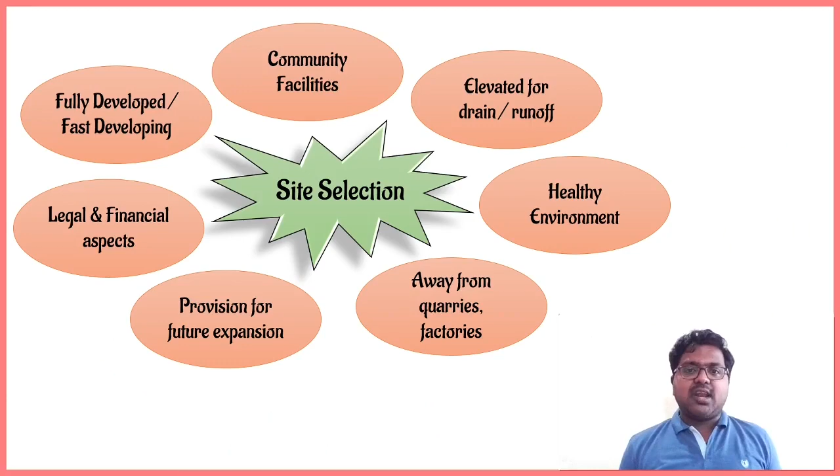In the last video, we learned about what building planning is, its importance, and the objectives of building planning. We also discussed the important points to be considered in site selection. Now, in this video, let us learn about the important building bylaws.

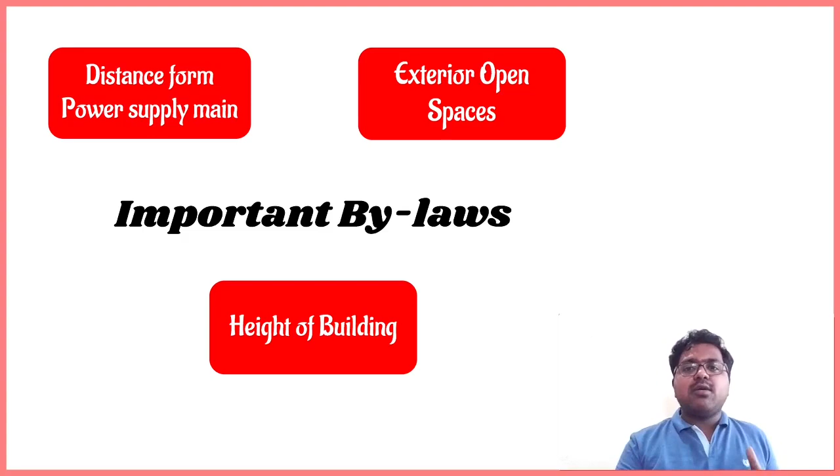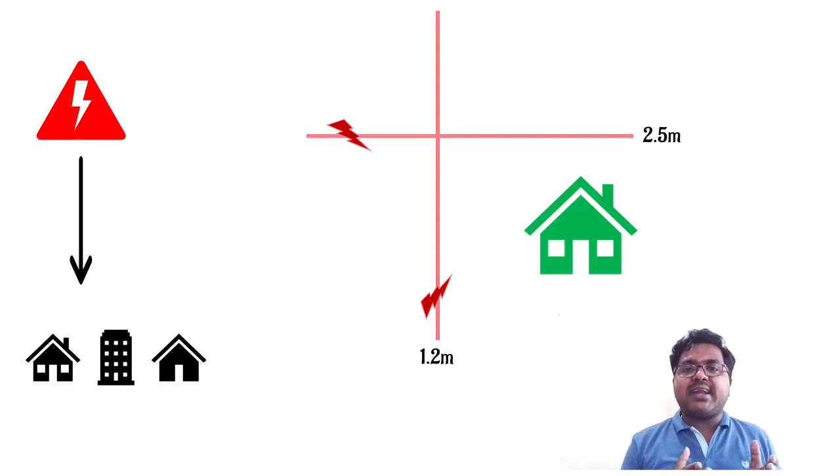Here, the important bylaws are divided into three categories according to NBC. The first one is distance from power supply main. Whenever we are considering a building near the power supply main, the building should be located in such a way that if low voltage power lines are passing, the building should be at a distance of 1.2 meters away from the lines if they pass sideways, and 2.5 meters away from the top.

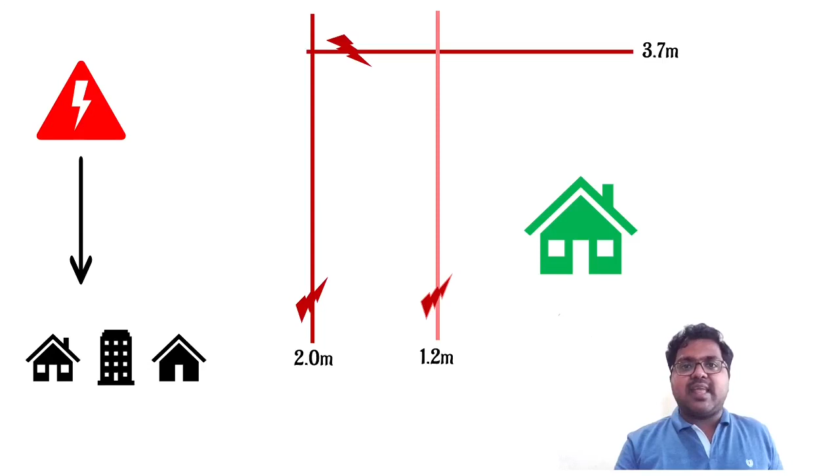This consideration is for low voltage lines, which are around 11 kilovolts. In the same way, when a high voltage line of more than 11 kilovolts is passing, the building should be located at a distance of 3.7 meters from the top, and 1.2 to 2 meters away from the sides. So according to the important bylaws, whenever an electrical main line passes through or sideways to the building, it should be located at a minimum distance of 1.2 meters away and 2.5 to 3.7 meters away on top.

Then the next one is exterior open spaces. These exterior open spaces govern the requirement of minimum open spaces around the building. Like setbacks, we need to give some open space on the front, back and sides of a building. These exterior open spaces are divided into three: front open space, rear open space and side open space. We should follow the minimum requirements according to these bylaws for these spaces.

The first one is front open space. Front open space depends upon the street width in front of the building. If the width of the street in front of the building is up to 7.5 meters, we should leave 1.5 meters of front space. In the same way, if the street fronting is 7.5 to 18 meters wide, 3 meters front spacing should be left. For 18 to 30 meters, it is 4.5 meters. And if the street fronting is above 30 meters, 6 meters should be provided in front of the building as free space, that is front open space.

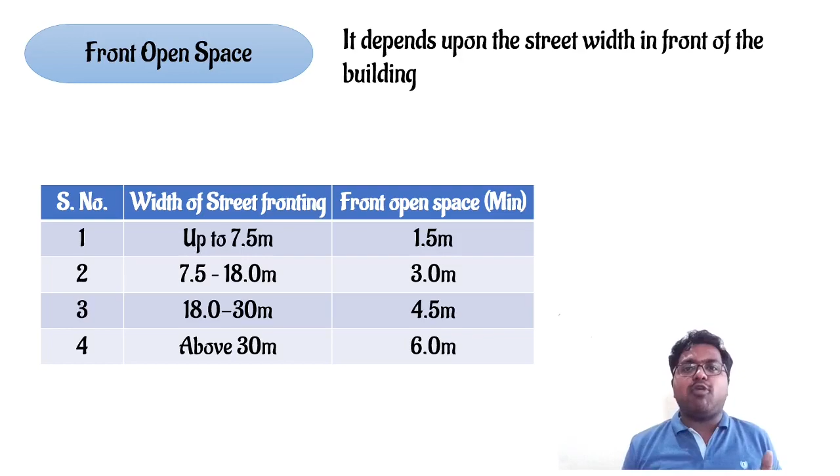Next, for rear open space, there are three main laws. First, the minimum rear open space should be an average of 3 meters and not less than 1.8 meters. So the minimum specification is to provide 1.8 meters rear open space behind the building. Next, in the case of back-to-back sites, the rear open space should be 3 meters throughout the length of the site. Then, for plots with depth less than 9 meters and building height less than 7 meters, a minimum space of 1.5 meters is allowed as rear space.

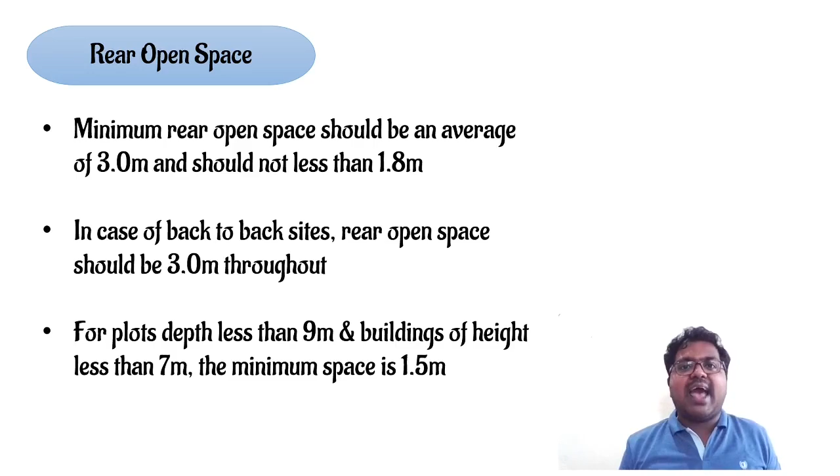Next, side open spaces. For side open spaces we also follow three conditions. The first one is for detached buildings: the minimum side spacing is 3 meters. For smaller plots, with permission from local or municipal authorities, we can reduce the side space to 1.5 meters. And the third one is for buildings with height more than or equal to 10 meters, where we should follow certain regulations according to NBC.

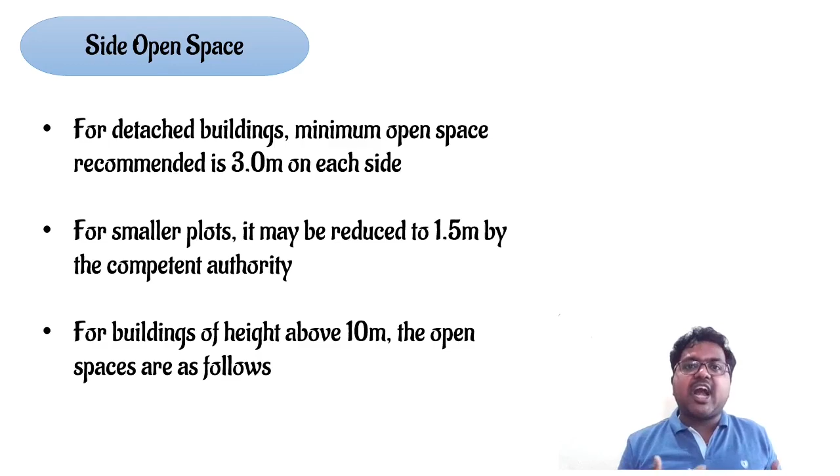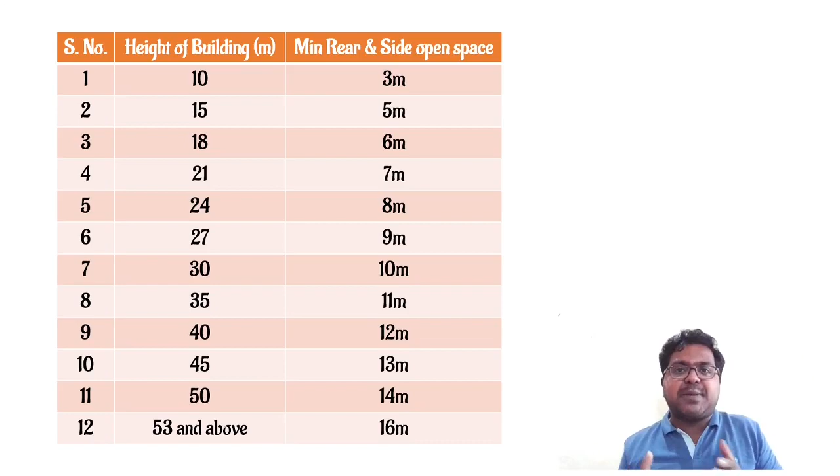See here, if the height of the building is 10 meters, the minimum rear and side space should be 3 meters. Likewise, if we increase the number of stories, the height of the building increases, and along with that, the rear and side spaces also increase. Majorly we have 53 meters and above: for a building of 53 meters or above, the minimum rear and side spaces are 16 meters. So this is for rear and side open spaces, and altogether this is regarding exterior open spaces.

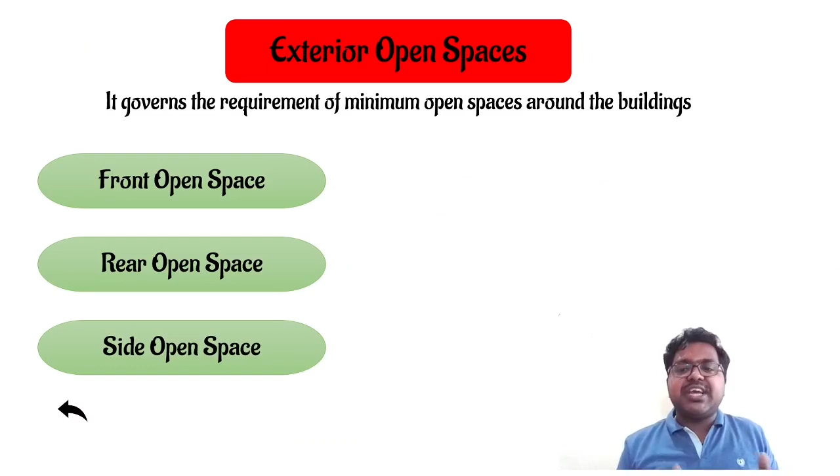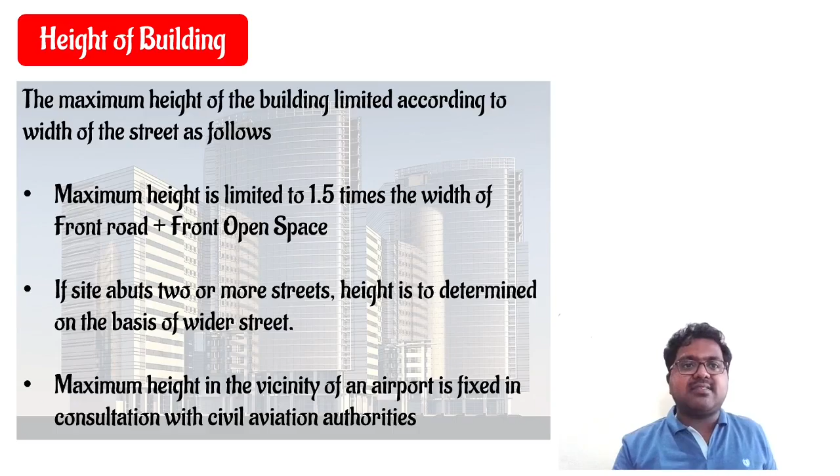When there is an airport nearby, there are fixed conditions given by the airport authorities, and we have to follow the conditions given by civil aviation authorities. The height may be limited to 3 floors or to only 15 meters. Likewise, civil aviation authorities give permissions for buildings regarding these heights. So that is regarding height. Next we have bylaws for requirements of buildings.

These requirements of buildings bylaws we will see in the next video.